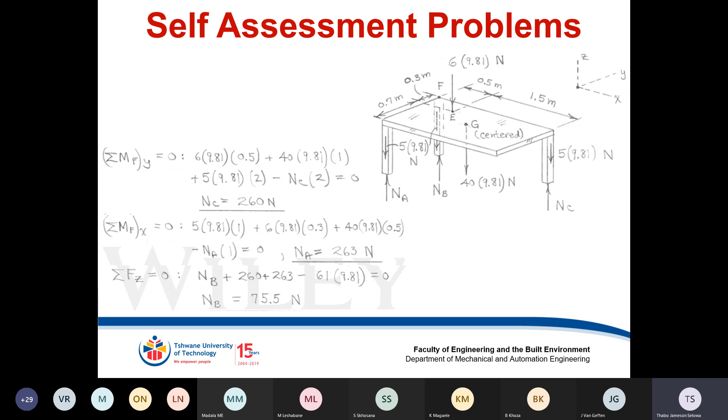Mr. Van Geffen. Not that one. Kekana, are you here? Yeah. Is it this one? It looks so. Kekana, are you here? Yes, sir. Okay, Tladi, are you here? Yes, sir. Whoever has done this problem—I'll just ask Kekana again, or must I ask someone else? Let's see. Kekana. Sir?

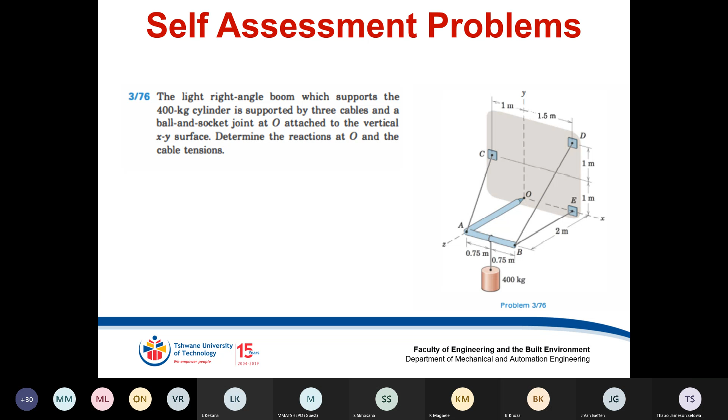Okay, we can go to the solution so I can explain. So we draw first—the free body diagram, right? And after that, we see that we have tensions AC, BD, and BE, and we also have OX, OY, and OZ.

It doesn't matter where you place your OX, OY, or OZ, because the sign is the one that's going to tell you whether OX goes away or towards the x-axis, or OZ or OY, so on and so forth.

Okay, first thing first, we need the unit vectors of the tensions TAC, TBD, and TBE. At the top there, TAC, they found the unit vectors of TAC in terms of I, J, and also K. So you firstly find the coordinates. We know how to do that.

So you firstly find the coordinates between A and C, the distances between A and C for the tension TAC in the x-axis, in the y-axis, and then in the z-axis as well. So they found that for TAC along the I, which is the x-axis, is -1, and then in the J it's +1, and then in the K it's -2. Then they divided that by the magnitude of the unit vectors.

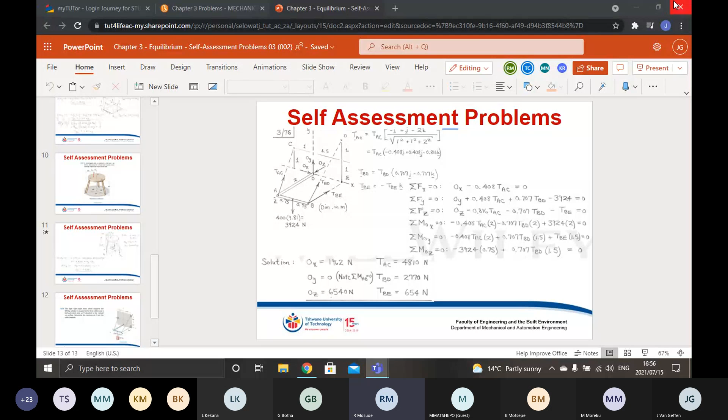Wouldn't you try sharing your screen or presenting your screen? Thing is, I don't know how, man. Mr. Botha, could you show him whilst you're still showing, on the screen? Could you show?

Do you all see now your names and stuff here? Yes, okay yes. Then all that Kekana can do is this. Okay, now it's gonna say stop sharing, or you must take control of everything, and you must just open the chats and click on this thing here.

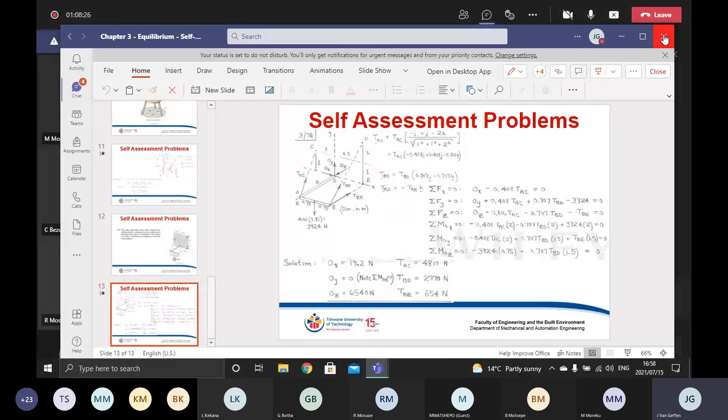Kekana, did you see what I do? Kekana? Yeah sure, okay now I'm gonna stop sharing, and then you're gonna do the same what I've done just now.

I go to share content, right? Yes, and then after that, what do you see on your screen? I see the screen, Windows 2, Microsoft Whiteboard. Okay, put the Windows thing, click on the Windows. Then there's Mr. TJ Selowa, Thursday session, and there's chat Microsoft Teams. Go to the chat, wait.

But then it's fine, man, I think we can do another problem so that we don't waste much time. I can share my screen and draw on the thing. That's fine, we can do more of the problems, try to explain them. Okay, sure, because I can draw on it now.

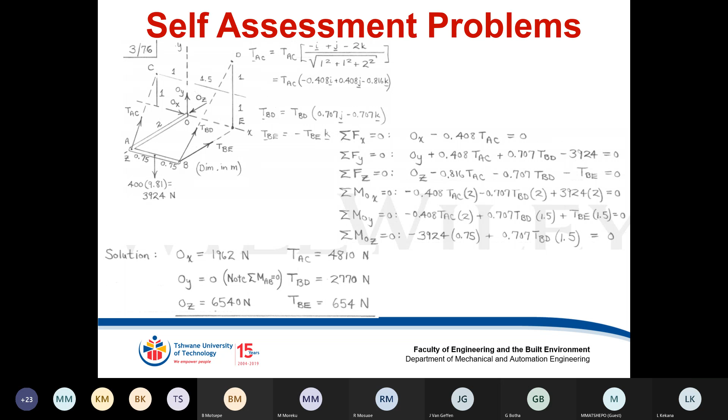No man, there's a big difference between sharing content and sharing the screen. Just share your screen. Okay. Do you guys see now my screen? Yes, 100%. Okay.

Okay, so everyone see everything now? Yes. Okay.

So are we clear about this one, or should we discuss more about this problem? Can y'all, if y'all don't mind, start and explain it step by step, how we are supposed to do this type of question? Okay, fine, how do y'all do it when y'all see it? Who, me? Yeah, just try to explain what you did from the start when you saw this thing.

Okay, the first thing, you read the question and try to understand what it wants. They say that the light right angle boom, which supports the 400 kilogram cylinder, is supported by 3 cables. Now I know that I have the mass, which is 400, and that this boom is supported by 3 cables. That's what I know. And then a ball and socket joint at O is attached to the vertical X and Y surface.

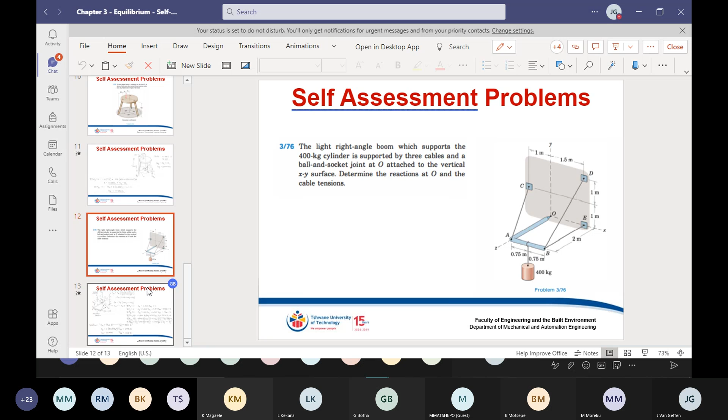Can you please go to the solution, the next one, so I can show you. So the first thing, you can take any tension that you want to deal with. Now I was gonna start with TAC the way they did. You see the TAC? So for TAC, you first look, you can just find the coordinates of A and C, right?

And then you can get the unit vector of TAC if you have the distances in meters, right? Am I going too fast? Okay, so what you did, you found the coordinates of A and the coordinates of C, then you subtracted them to be able to compile a unit vector.

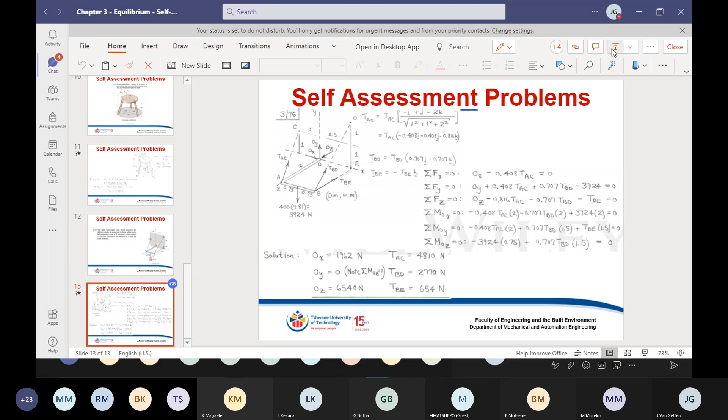I don't know if you can hear me. Yeah, I can. I'm having a network problem, so I'm sorry about that. I'm having another problem.

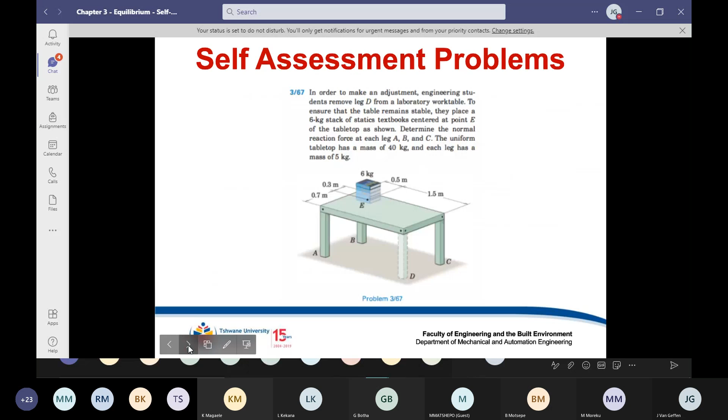So then you have to find the I, J, and K of TAC - the magnitude of TAC. You find the coordinates of A and of C so that you can get the unit vector for TAC. Only to find that the distance for TAC along the I is minus 0.408, and then along the J it's 0.408 J, and then along the K it's minus 0.816. Then you're done with TAC, right?

Same thing that we did in 2 dimensions. Then you go to TBD. You look at the tension of TBD, only to find out that for the tension in TBD, there's no I, there's no X. You see that X is 0, we don't have the I component.

But then we have the J component, which is 0.707, and we also have the K component, which acts along the Z axis. And then for TBE, the tension in TBE, the one that is down there on your free body diagram - for TBE we don't have X, we don't have Y, but there's only Z axis, which is K, between B and E for TBE.

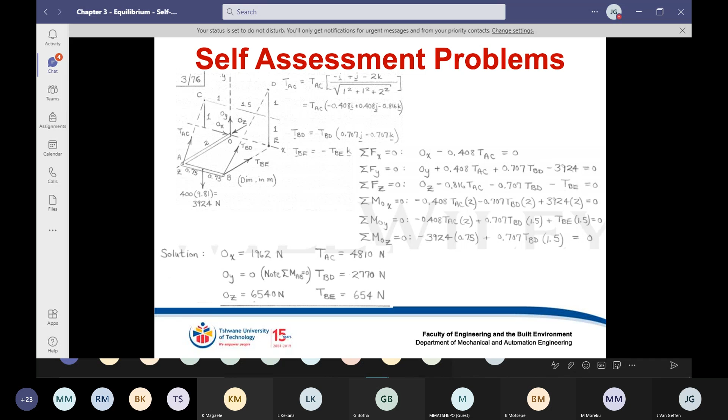Okay, can we do another question, or are there questions? This is the last question of the slide. Yeah, can we do that one for the stool? The secular, yeah, that one. Can I just explain the approach? Like, yeah, we read the question just like we did the last one. Please, pretty please. Mr. Van Geffen will do it. Yes, you're already in the mood.

Or can we do that one, the 3.70? I'll let him do this one. Can somebody please just try to help us? Anybody? I think Ghana has left us. Oh, he's still there, ish. Oh. I'm trying to think how I'm gonna approach this one because I never tried it, so I just want to see.

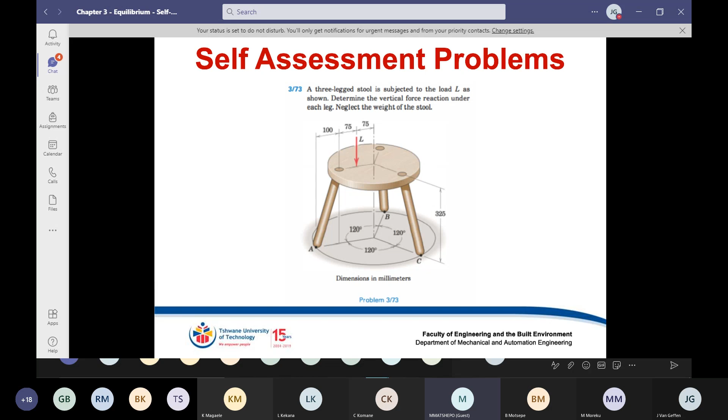Can you go back to the question? Thank you. So the weight is not acting at the center. Okay. You might want to grab this one. Because this seems to be my problem, the 250 cos 60, that one seems to be the problem.

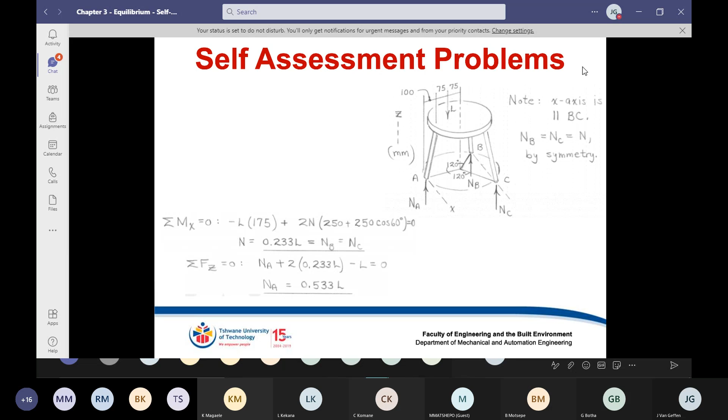Anyone who knows it can help. I got it, a discussion. Can I share my screen? Yeah, you can, yes you can. Okay. Can you see my screen? Yes, okay, just check, yeah. You see me drawing? Yes. Can everybody see me? No.

Can't you see the drawing? I saw when you started, you clicked on the color, but now it's frozen. Give your network some time. It might just be your network. Yeah, but now it's working. Yeah, okay, so you can see me drawing now. Yeah, now I can see you drawing.

Okay, so basically what we do is we want to figure out the distance from the x-axis because we are trying to work with the moment of the x-axis, correct? Okay, so we're just trying to get this distance from the x-axis to these legs because they say that the x-axis is parallel to BC. So you need this distance for the moment. Firstly, we need to calculate this distance from the midpoint of the chair to here. Let's say these are 120, so then this one must also be 120 right here, meaning that this angle here should be 60.

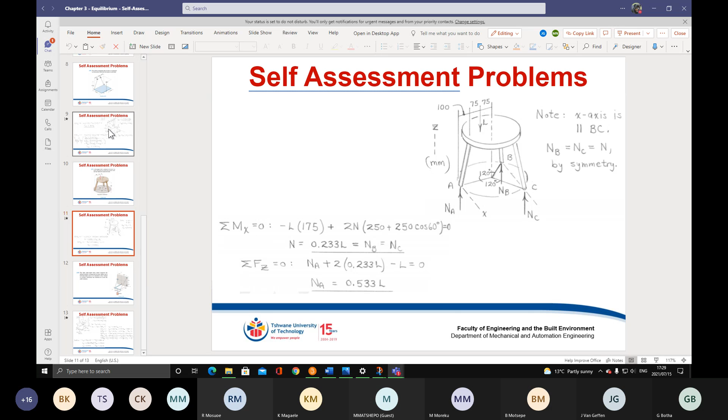This chapter, that one, you see that one? Oh, which one? This one. No, the one you were at. This blue plate? Yeah, that one. Okay, just move this thing out of the way. I'm also going to take a screenshot of this one real quick. Okay, just find it here. Where is it now? Wait, let me redo it. Here we go.

Okay, so is there a specific point where you are stuck, or do you just not know where to begin? I don't know where to begin. Okay, let me just get the question real quick again, see what they ask.

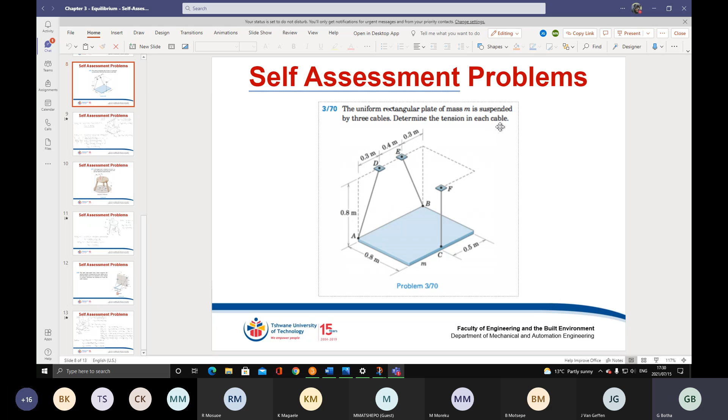Determine the tension in each cable. Okay, go back to this picture.

Can I ask? Yes. Without looking at the answer, my approach would be to look for the unit vector for each tension. Then after finding the unit vector, I would do the same thing which we did last time, so I want to see if we get the same thing.

Sorry? You're breaking up. Yeah, you can try to explain it, please. Can you hear me? Yes, I can hear you. Yeah, can you just explain to me how you would approach it? Yeah, okay, I got it wrong.

Okay, let me just quickly see here if they put in an axis. No, they didn't. Okay, you guys know how to make the unit vectors with the coordinates, or?

Yes. Okay, so that's what we'll do first, because we have all the coordinates of these lines. So we can make the x-axis maybe from point A over to here, and the y-axis from A down here, crossing through B, and the z-axis from here up. So A's coordinate is at 0, 0, 0. So then you can work from there to take all the coordinates into consideration, and then you can get a unit vector for all the cables.

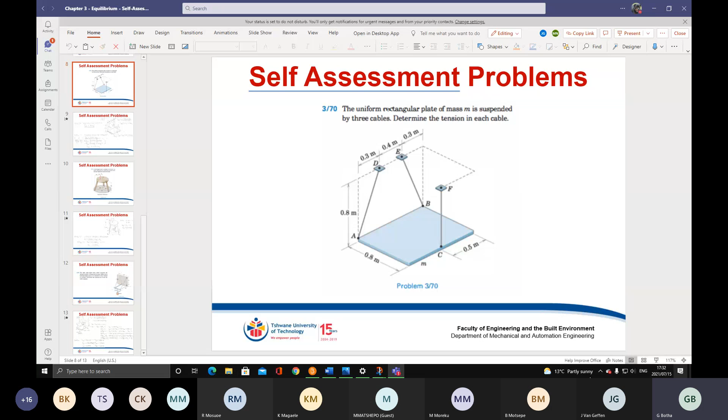Yes. Let me just see if I can also take a screenshot of this, maybe, so I can draw on here. Okay, let me.

So okay, I'm writing with a mouse, so it's quite difficult. I'm sorry if it looks bad because I'm writing with a mouse. No problem, now I'm the one who should be thanking you.